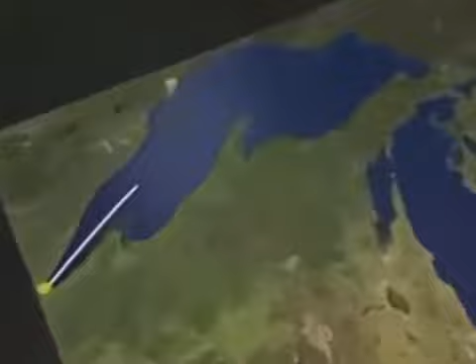When the storm had passed, the Edmund Fitzgerald was to deliver its iron ore to its final destination in Detroit steel mills, where the ore would be used to make cars.

Despite the storm, the men were confident in their safety because the Fitzgerald was one of the strongest and most capable ships on the lakes. This was a big, powerful boat, and people really wanted to be on the Edmund Fitzgerald. This was the one you aspired to serve on.

In fact, when it was launched in 1958, it was the premier ore carrier on the Great Lakes, setting records for the largest loads carried and the fastest trips.

The captain, Ernest McSorley, was also one of the most experienced in the business, with 44 years of sailing on the Great Lakes. But on November 10th, 1975, McSorley was virtually blinded by two critical navigation system failures.

He reported to a nearby ship that both of his radar units weren't working, and the radio direction finder was useless because of an outage at a station on shore.

That nearby ship, a few miles behind, was the Arthur Anderson, a slightly larger carrier also trying to reach Whitefish Bay. Captain Bernie Cooper, using the Anderson's radar, was radioing general compass headings to the Fitzgerald's crew.

The pilot house of a ship nearly identical to the Fitzgerald, the William Clay Ford, at the Dossin Great Lakes Museum in Detroit, gives a sense of what the captain and crew of the Fitzgerald were dealing with on November 10th.

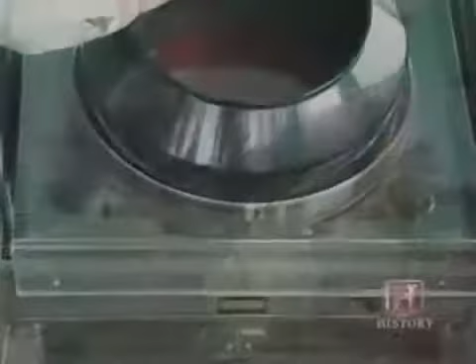This is the radar unit on the William Clay Ford. It's very similar to the one that was on the Edmund Fitzgerald. The Edmund Fitzgerald's radar unit, however, that night was out. For whatever reason, both units didn't work.

Why both of the Fitzgerald's radar units didn't work remains a mystery. There were no reports of problems before the ship left port. It's possible that the huge waves or high winds disabled the antennas on the Fitzgerald's roof.

But the Anderson battled the same storm without any radar problems. The other option they had was to use the radio direction finder. With this, they could triangulate their course. However, the Whitefish Point sending station was out of service.

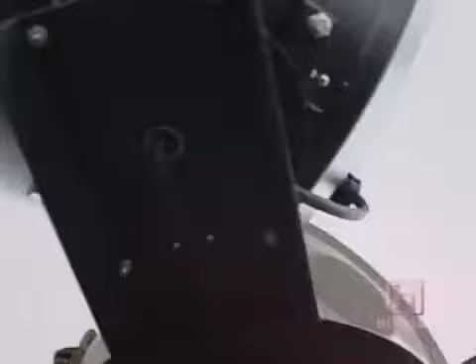On shore, the radio direction beacon at the Whitefish Point lighthouse didn't work. The storm had knocked out power, and the backup generator didn't kick in as it was supposed to. These failures may have doomed the Edmund Fitzgerald.

At about 3:30 in the afternoon, McSorley reported to Cooper that one of the fence rails, part of the sturdy safety fences on each side of the Fitzgerald, had snapped. He also said two vent covers were missing, and the ship was listing to the side, evidence that water was entering the Fitzgerald.

These were all signs of severe damage, but the ship soldiered on, pumping out water as it went.

Then at 7:10 p.m., the first mate aboard the Arthur Anderson asked McSorley how the men of the Fitzgerald were doing. The response back from Fitzgerald to the Arthur Anderson was, "We are holding our own." That was the last communication between the two ships.

Minutes later, the Edmund Fitzgerald disappeared from the radar screen aboard the Arthur Anderson, without as much as a distress signal.

After a difficult and limited search during the storm, and a larger search the next day, it was clear the unthinkable had happened. It looks from the information that we have that it's fairly certain that the Fitzgerald went down, and we're talking now about a matter of life and death and looking for survivors.

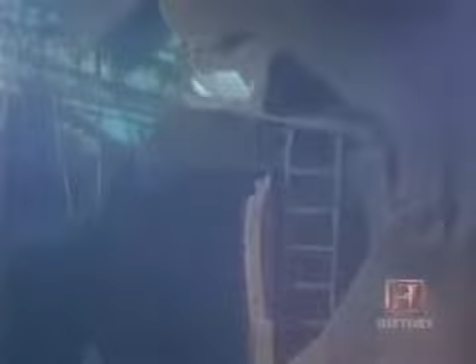The ore pellets from the cargo hold were strewn about, and the middle 200 feet of the ship had disintegrated into small pieces. But finding the wreck didn't provide answers to the questions about what caused the Fitzgerald to sink, and why the crew never called for help.

More than 3 decades later, strong opinions still surround the theories of the ship's tragic fate. A Coast Guard investigative board looked into many possibilities. Probably the only one they could confidently rule out once the wreck was discovered was that the Fitzgerald had broken in half on the surface. The ship didn't break in half because the bow would have floated for a while longer and the stern would have floated for a while, and they both would have disappeared a little bit further apart. Instead, the two pieces of the ship lay only a few hundred feet apart.

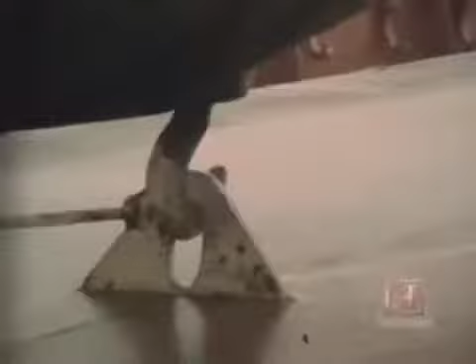In terms of official findings, the Coast Guard report issued on July 26, 1977, concluded that water crashing on the deck and leaking through cracked and poorly sealed hatch covers was the most likely cause of the disaster. The seals on freighter hatch covers were often damaged during loading and unloading, and crews often skimped on the tedious process of tightening most of the hatch cover clamps.

Still, many people disagreed with the Coast Guard's theory. If water was leaking in through the hatch covers, then the pumps that were on - these 7,000 gallon per minute pumps, and there were 2 of them going - should have been able to keep up with as much water as these hatch covers would allow through leaking.

The Lake Carriers Association, which represented 15 shipping companies, protested to the National Transportation Safety Board, which issued its own findings on May 4, 1978.

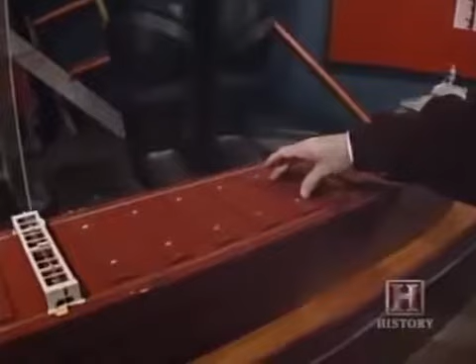The NTSB also focused on the cargo hatches, but in a different way. It felt the tremendous weight of the water crashing across the Fitzgerald's main deck, known as the spar deck, forced one or more of the hatches to implode and swiftly flood the cargo hold. You can tell by the size of these things, the 729-foot freighter - these things weigh tons, and it would take an awful lot of weight to cause them to implode.

Finally, the Lake Carriers Association proposed its own theory, that the Fitzgerald struck bottom in the shallow waters around Caribou Island, a plausible consequence of the ship's navigation system failures. Hitting bottom could have caused a rupture in the hull below the waterline. The downed fence rail and missing vents that McSorley reported near Caribou Island seemed to bolster that scenario.

This was serious. How serious? Not serious enough that McSorley thought he couldn't continue on. He had his pumps going. He thought he had it under control. But as Bernie Cooper pointed out later, it's serious when a fence rail comes down - that indicates an incredible change in tension in the hull itself.

The type of tension that would result from the middle of the 729-foot ship hitting bottom. And if you hog a ship - meaning cause it to bend up in the middle - you can stretch those cables and cause them to snap because they're supported with stanchions all the way along. Something's got to give. But since there are no scrape marks on the portion of the hull wreckage that can be seen, bottoming out, like the other explanations, remains just a theory.

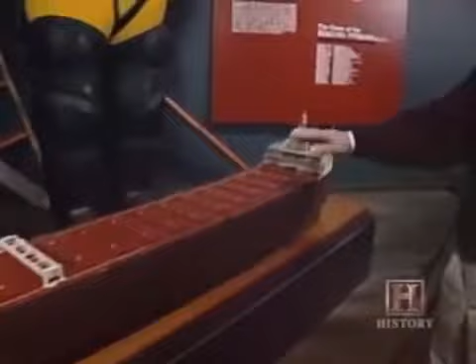However, one thing most of these theories agree on is that the Fitzgerald was taking on water faster than it could be pumped out. And the more water that came in, the lower the ship would ride in those high seas. The waves were actually boarding the Fitzgerald on the starboard quarter, rolling the full length of the deck, the spar deck, and hitting the back of the pilot house, actually forcing this 40-foot high structure underwater, and it'd come back up and shake the water off the deck and keep going.

But one of those dives that did under one of these huge waves was the final dive, and it just kept going, 535 feet to the bottom.

If McSorley believed the ship would resurface after that final wave, then the first sign of trouble, and the last, would have been a wall of water bursting through the windows of the pilot house from the increased pressure of deeper waters. This would explain why there had been no distress call.

But there's still no single theory about the tragic fate of the Edmund Fitzgerald that will satisfy everyone. The bodies of all 29 crewmen remain entombed in that watery grave, and at the request of their families, divers are no longer permitted near the wreck.

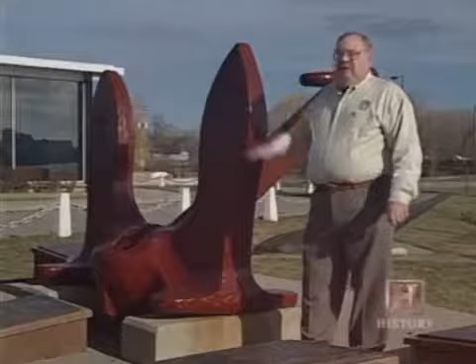But those relatives do have two special places where they can feel close to their loved ones. Just outside the Dossin Great Lakes Museum in Detroit, an anchor that belonged to the Edmund Fitzgerald prior to its last voyage is displayed. It is the centerpiece in the annual November memorial. We put 29 lamps out here around it, one for every crew member on the Edmund Fitzgerald.

And at the Great Lakes Shipwreck Museum at Whitefish Point, the original bell from the Edmund Fitzgerald is the centerpiece of the collection. Known as the voice of the ship, it was recovered from the wreckage at the request of the families on July 4th, 1995.

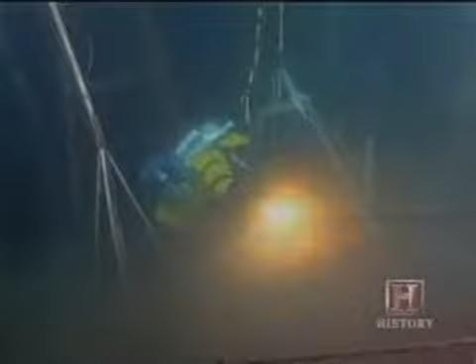When this bell broke the surface after 20 years of darkness and silence, it actually swung and tolled, and everybody around for about a mile could hear it. It was one of the most eerie experiences I've ever had, and the tone itself has such a resonating quality to it that is something that you'll never forget.

After the original bell was recovered from the wreckage of the Edmund Fitzgerald, a replica bell was put in its place. The names of all 29 crew members were inscribed on the replica, which serves as a permanent grave marker.

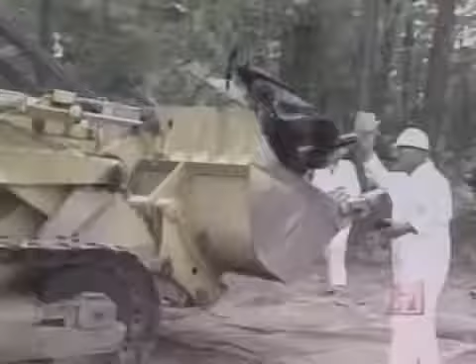Investigators rushed to the scene, immediately aware of the similarities to the 1991 Colorado Springs crash. This time, they had more information to work with. We had more flight data recorder parameters. And also, with US Air 427, the rudder power control unit that controls the rudder was intact. It was in a testable condition, which we didn't have before.

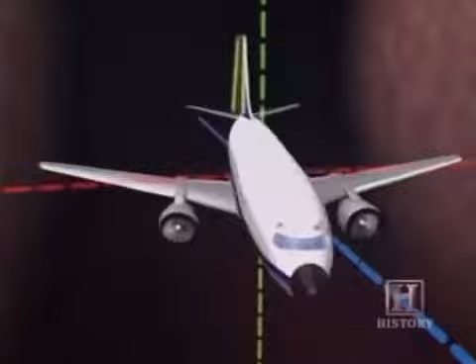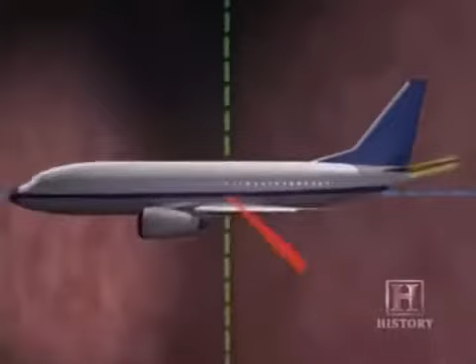The rudder of an airplane functions much like the rudder of a ship, turning the aircraft to its right or left, which is known as yaw. Flaps on the wings, known as ailerons, control the roll of the plane to the left or right. Adjusting the horizontal stabilizer on the tail affects the pitch, which raises or lowers the nose of the plane.

But extreme rudder movements can affect more than just the yaw of an aircraft. What happens when the rudder reaches its full travel limit is that the airplane slips through the air sideways. And as a result, for airplanes that have swept-back wings, one wing develops more lift than the other, and the airplane then starts to roll.

At relatively low speeds, such as during takeoff, or in the case of both crashes, on approach to landing, if the extreme rudder position is not corrected, the rudder will overpower any aileron adjustments and force the aircraft all the way over, leading to a nosedive into the ground.

Initial tests of the US Air rudder equipment didn't reveal any defects. Because the crash happened on a clear evening with little wind, adverse weather could be ruled out. The only other possibility seemed to be pilot error or disorientation.

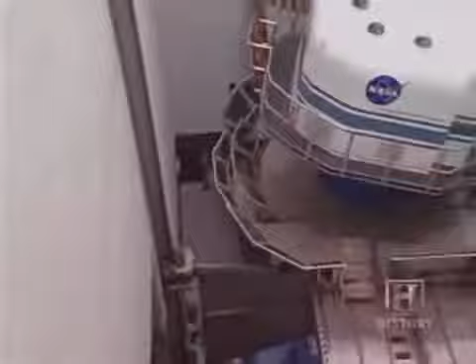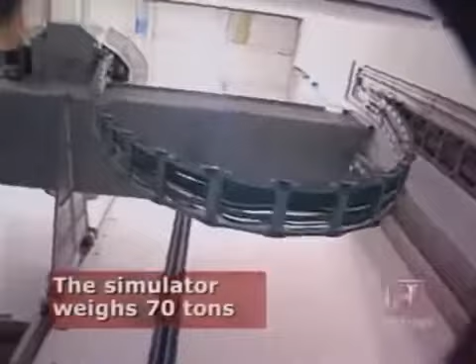To test the motion effects recorded from the US Air flight in 1994, investigators went to the NASA Ames Research Center in Northern California, home of the world's largest flight simulator. Unlike other simulators that simply pivot on a stationary platform, the center's vertical motion simulator can move 60 feet up or down and 40 feet side to side.

Pilots that we've had from all over the world that have come in to fly the vertical motion simulator say that it replicates flight like no other simulator they've ever been in.

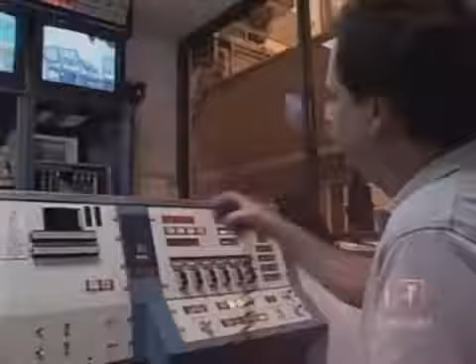Technicians loaded information directly from US Air 427's flight data recorder into the simulator's computers. The result, seen here using the same flight information, was a chilling reconstruction of what the crew most likely saw and felt.

As we roll out, there'll be a wake vortex upset that resulted from a 727 that was flying ahead of the 737, and that started the maneuver. Right there you feel the wake vortex upset. The pilot then tries to right the airplane, but during that process the rudder goes over hard to the left, and as a result the airplane rolls uncontrollably to the left. It must have been terrifying in the cockpit.

Nothing from the work in the vertical motion simulator led investigators and motion experts to believe that pilot error or disorientation were factors in the crash.

They returned to the rudder control system but could still find no sign of malfunction. Then, a vital clue: in June 1996, an Eastwind Airlines pilot reported rudder problems. It seemed like the hydraulic system of his 737 was actually pushing back when he depressed the foot pedal that controlled the plane's rudder. Luckily, the plane didn't crash because the incident didn't occur during takeoff or landing.

This incident led NTSB investigators to examine how the rudder could have moved opposite of the pilot's control. They focused on the hydraulic heart of the system, the rudder's dual servo valve power control unit.

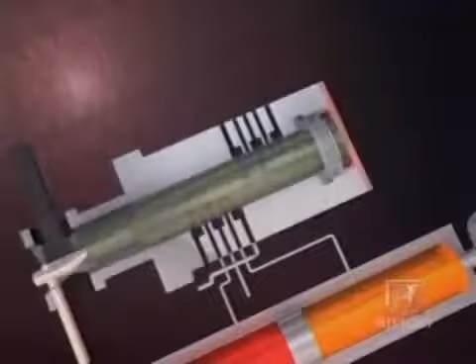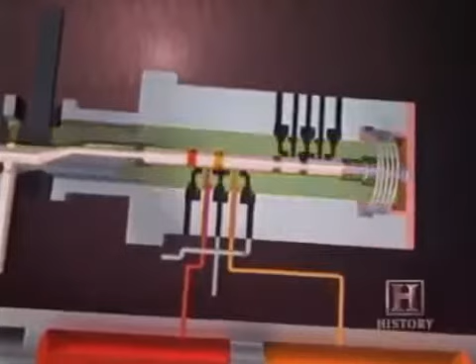It's about the size of a soda can, and inside of that is a valve about the size of a pencil that's got ridges in it, and it moves back and forth and ports fluid. That's the primary valve. Around that is a slightly larger valve, cylindrical in shape with ports in it, and that's the secondary valve. When a rudder is operating normally, only the inner primary valve is supposed to move.

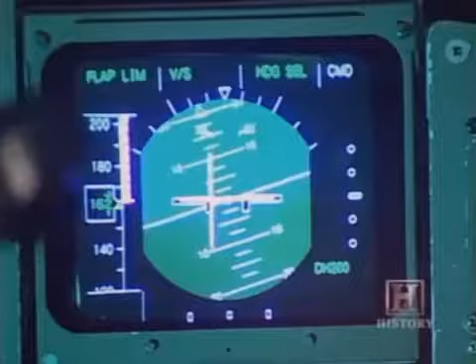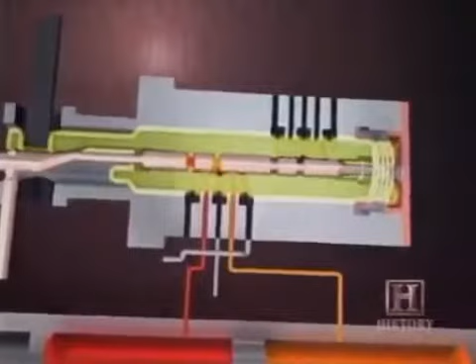Depending on which direction a pilot wants to turn, the hydraulic pressure either extends or retracts a piston, which then turns the rudder. Once the pilot's foot is off the pedal, the pressure is released, and the rudder returns to a neutral position. The outer secondary valve only moves if the smaller primary valve becomes stuck.

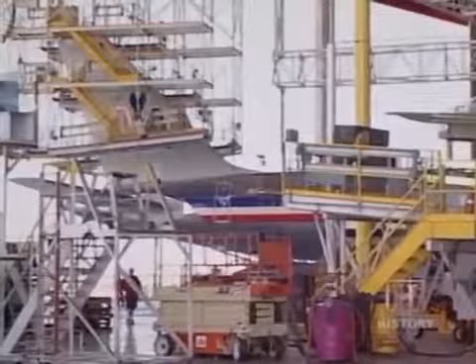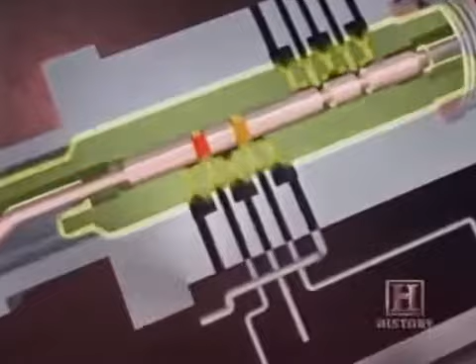Virtually all aircraft systems have both a primary and a backup, an important design feature known as redundancy in the airline business. But since the 737's rudder power control unit used two valves within the same hydraulic system, the valves were not totally independent of each other.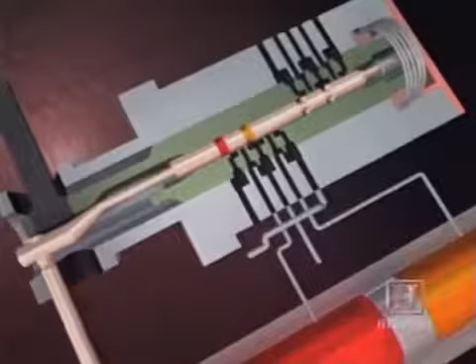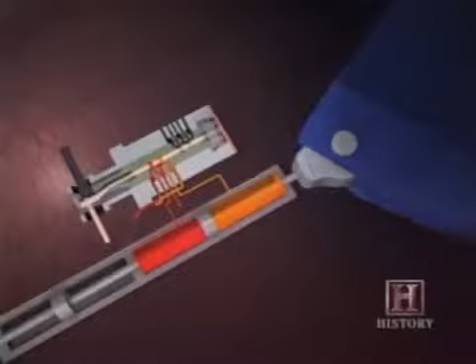In 1998, investigators discovered how the valves had created the deadly problem. We saw that if the secondary valve were to be jammed just slightly off neutral, and you put in a high rate command into the primary valve, you could misport the hydraulic fluid and cause the rudder to reverse operation. This would be very similar to driving your car.

You turn to the right, the car goes left. You probably will keep trying to turn to the right. You won't figure that out before you go off the road.

The longest NTSB aircraft investigation in history was finally over, 4.5 years after the US Air 737 crash in Pittsburgh.

Instructors immediately taught 737 pilots ways to correct the problem, such as momentarily removing a foot from the pedal to release pressure in the event of a jam, and switching from the primary to the secondary hydraulic master control for the entire aircraft in order to free the rudder.

The training continues today because the new units with two completely separate rudder control systems are still being installed. In fact, the retrofit process won't be complete until near the end of the decade. However, the planes are still safe in the meantime, thanks to extensive pilot training. And the 737 seems destined to remain the workhorse of the industry as the design changes are completed.

Since the 737 debuted in 1968, Boeing has built over 5,000 of the planes, making it history's best-selling passenger airplane.

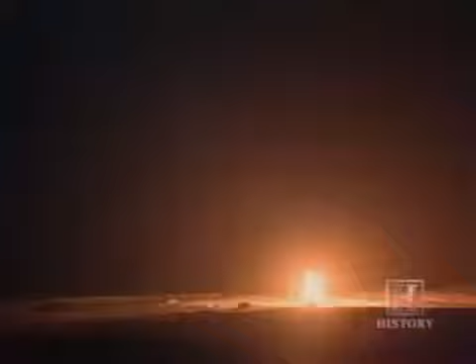We now return to engineering disasters on Modern Marvels. In 1959, just 30 miles from downtown Los Angeles, a little-known nuclear disaster began to unfold at an important Cold War facility. The Santa Susana Field Laboratory, created by the government's Atomic Energy Commission and operated by Rocketdyne, played a vital defense role by producing powerful rockets. The 2,800-acre site was built in the hills above Simi Valley, a town of 8,000 just west of Los Angeles's San Fernando Valley.

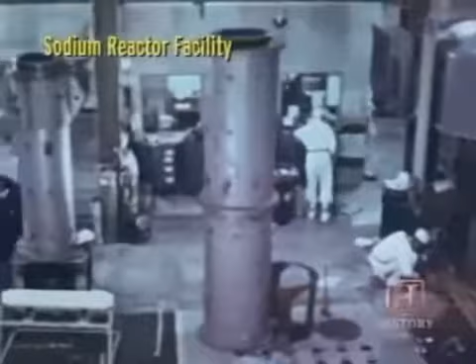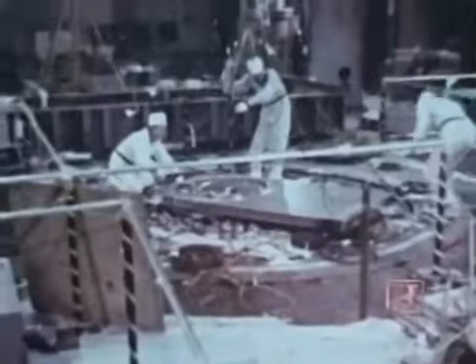Besides rockets, it was home to several experimental nuclear reactors, which the Atomic Energy Commission hoped could be commercially viable. One of them used sodium instead of water as a coolant. It was known as the Sodium Reactor Experiment, or SRE. But the experiment would soon trigger a technological nightmare.

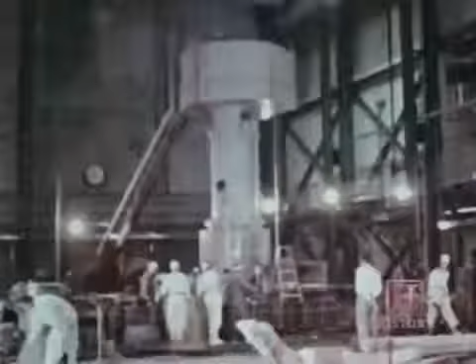This reactor was built in an era of nuclear cowboys. The Atomic Energy Commission came out of the Manhattan Project. There was a culture of secrecy, and a sense of excitement about pushing the limit on these reactors.

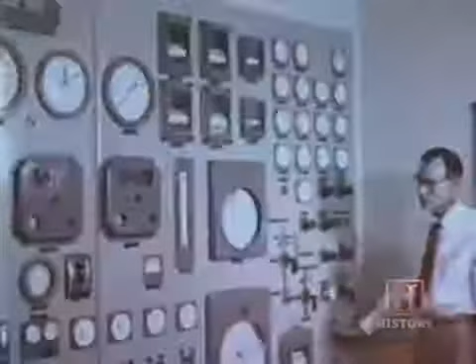On July 13, 1959, technicians barely managed to manually shut down the sodium reactor when temperature and radiation readings quickly jumped. Then, after 2 hours of basic inspections, they made a baffling decision: they started up the reactor anyway. They operated it for about 2 more weeks before radiation levels and so many signs of trouble made them think it was time to stop and get serious about finding out what was going wrong.

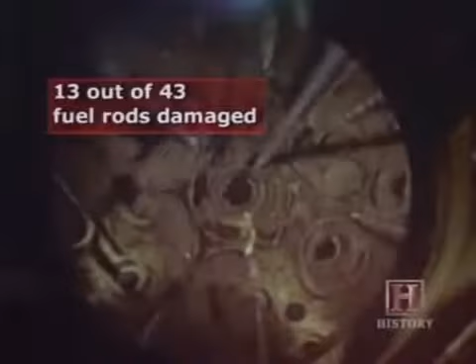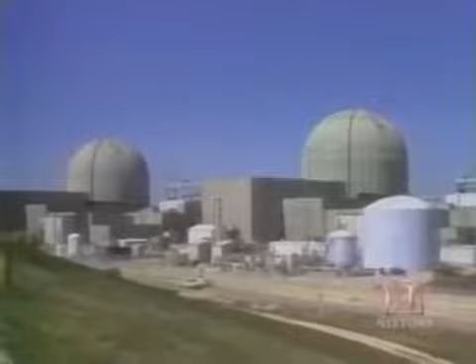When they dropped a camera into the reactor core, they discovered that 13 of 43 radioactive fuel rods were damaged and partially melted. Because this was an experimental reactor, a thick concrete containment structure, such a familiar and vital part of more modern reactors, wasn't required. It was just built in an ordinary industrial building. In fact, it was designed so that radioactive gases would be intentionally vented from the reactor to holding tanks and then out into the environment.

Exactly how much radiation went into the atmosphere is still a matter of debate, because the monitoring equipment at the facility could only measure very minor levels of radiation.

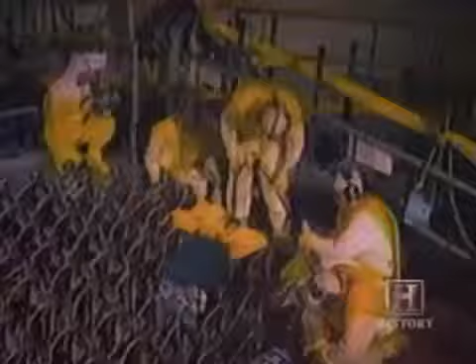This was a much smaller reactor than the one at the site of the famous Three Mile Island accident in Harrisburg, Pennsylvania in 1979. But because it didn't have a containment dome, the sodium reactor might have created a much bigger problem. The SRE was about 1/100th the size of Three Mile Island, and the containment structure at Three Mile Island, according to official government reports, stayed intact, with only a small fraction of the radioactive inventory officially estimated to get out. Several researchers have estimated that the radiation release from the SRE could be as high as 240 times the radiation release from Three Mile Island.

5 weeks after the accident, the Atomic Energy Commission issued a press release claiming that just a single fuel rod had been slightly damaged and no radiation had been released. The release stated there was no evidence of unsafe operating conditions. In reality, 1/3 of the fuel had experienced melting. It was one of the worst accidents in nuclear history, and the AEC essentially lied about it.

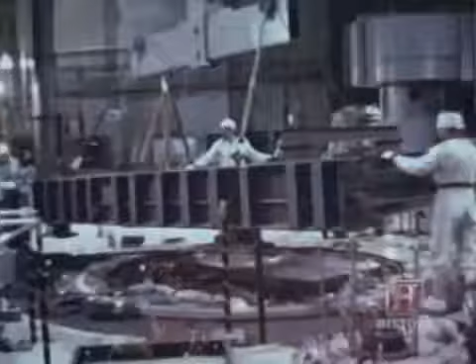In 1961, the Atomic Energy Commission made a film documenting the extent of the damage and cleanup process. It also explained exactly what went wrong inside this unique reactor, where molten or liquid sodium was used instead of water to remove heat from the swimming pool-sized reactor area.

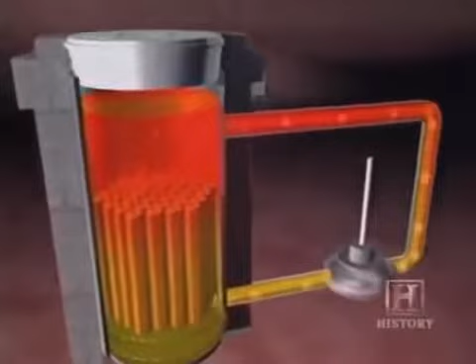Sodium reactors were being developed because there was a concern there wasn't enough uranium to fuel all the nuclear reactors being built at the time. Sodium reactors never deplete their original fuel supply, while water reactors are less efficient, since they consume uranium and eventually need to be resupplied.

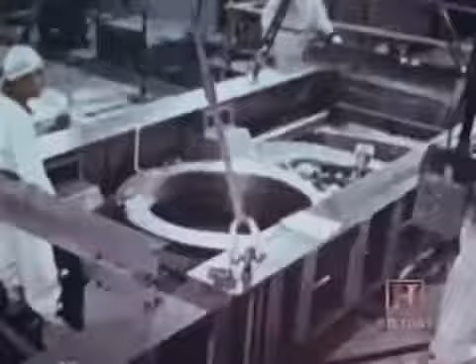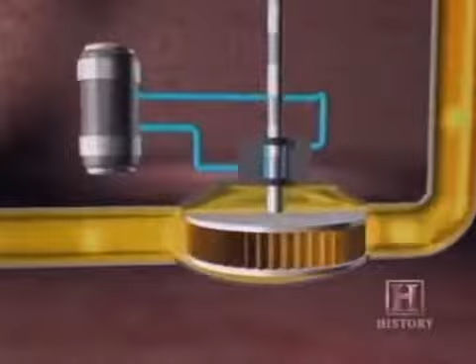But the benefits of liquid sodium came with a price. Sodium burns in the presence of air and explodes in the presence of water, so the reactors had tremendous danger associated with them. Because water couldn't be near the reactor, a chemical known as tetralin was used to cool the bearings in the pumps that circulated the sodium as it carried heat away from the fuel rods.

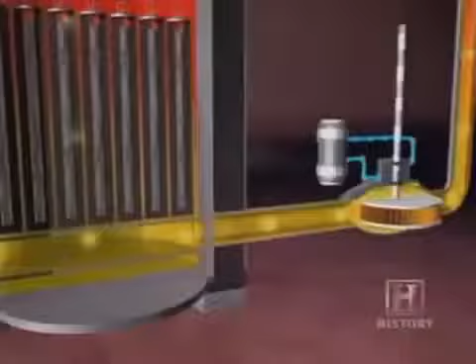Everything worked well until tetralin started leaking through cracks in the pump seals and into the reactor. The neutron bombardment inside the reactor core caused it to turn from an organic chemical into almost like a glue or tar-like substance. As the tetralin approached the fuel rods, it partially blocked the bottom of some of the coolant channels. When coolant flow decreased, the heat by those fuel rods increased and eventually reached melting point.

What happens when the fuel starts melting is the radioactive byproducts, which have been created from reactor operation, have to go somewhere. So those radioactive byproducts go into the molten sodium, and some of those byproducts come out as a vapor, and in this case went into the air.

Some of the radioactive materials, like strontium, are actually absorbed by the body into the bones and teeth, so they remain in the body for a long period of time, all the while releasing radioactivity that can harm cells and other parts of the body.

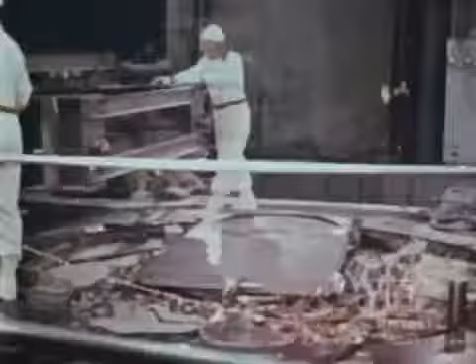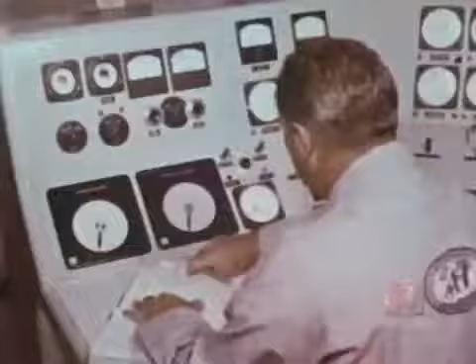Workers who cleaned up after the accident or worked at the facility once it was restarted were at highest risk. Studies done of the workers by a team from the UCLA School of Public Health found that the workers who had the highest radiation exposures had tripled death rates from cancers such as cancer of the lung, lymph, and blood systems, compared to similar workers at the site who had lower radiation exposures.

The University of California at Los Angeles was also responsible for bringing the story to the public. After the 3 Mile Island accident in 1979, some of Daniel Hirsch's students started wondering if anything like it had ever happened in Southern California.

In UCLA's engineering library, they found documents and photographs of the melted fuel rods from the sodium reactor accident at the site run by Rocketdyne's Atomics International division. By a quirk of fate, it turned out that the man who had founded and run Atomics International had subsequently become Dean of Engineering at UCLA and taken with him box loads of the old documents.

We then released that to the press in 1979. So the AEC kept it secret, and it stayed secret for 20 years. The Atomic Energy Commission also managed to conceal accidents at 2 other reactors at the Santa Susana facility in the 1960s.

Today, the reactor buildings have been torn down and taken away, but years of cleanup work remain. Health effects on the surrounding communities have been difficult to study because of their large populations and the fact that many people have moved out of or into the area over the years. And Southern California's population continues to swell. People are living closer than ever to the site, which is now owned by Boeing.

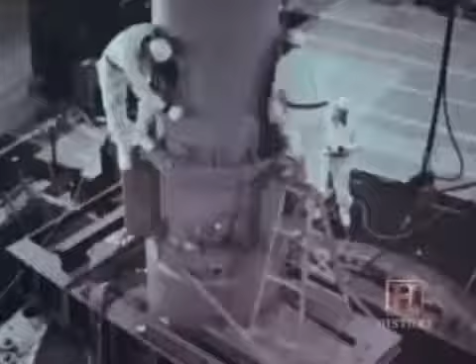Because certain types of radiation released in the accident can remain at dangerously high levels for centuries, the decisions made at Santa Susana in the 1950s and 60s will continue to affect residents for generations to come.

Of the 3 most prevalent radioactive elements identified at the Santa Susana site, cesium-137 has the longest half-life at 30 years. Dangerous amounts of it will remain there for about 300 years.

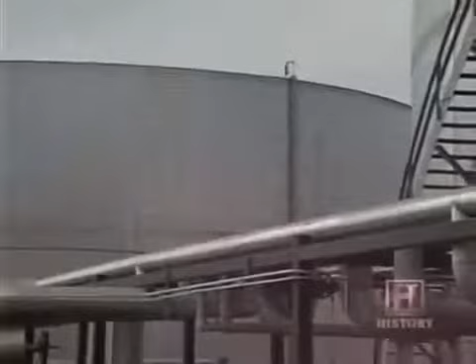25 miles south of Pittsburgh, in the heart of one of Pennsylvania's industrial valleys, along the banks of the Monongahela River, 4 million-gallon storage tanks mark the site of a past disaster. In 1988, when the oil storage facility in Floreffe, Pennsylvania was owned by Ashland Oil, different tanks located in the same spots held fuel oil.

On January 2nd of that year, a typically frigid winter day, a 40-year-old tank was being refilled for the first time after being disassembled in Cleveland, Ohio, and reassembled in Floreffe. Then, in less than 1 second, the tank cracked vertically, releasing a tidal wave of about 3.8 million gallons of oil. When the tank split, the force of the weight of oil in the tank pushed the shell of the tank, the skin of the tank, back against this dike wall in this direction.

The oil rushed over the containment dikes in front of the split, hurtling toward other nearby tanks. The tank that collapsed, which was behind me, released the oil. The tank that was formerly in this direction was dented by the force of the oil approximately 20 feet up on the wall of that tank. The tank was empty, but it gives you some perspective on how much force there was involved.

While some oil remained inside the dikes, the faster parts of the flow raced over the final barriers at the south end of the facility. When the oil went off to my right, it went over the last dike in that direction into a parking lot. The parking lot has a drain in it. The oil followed that drain into the Monongahela River.

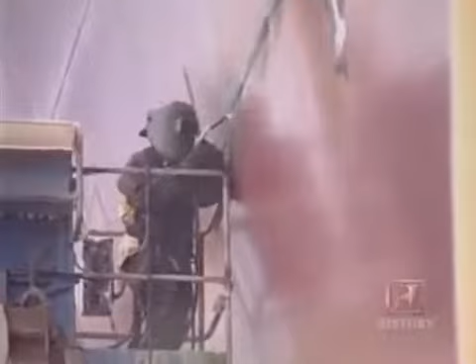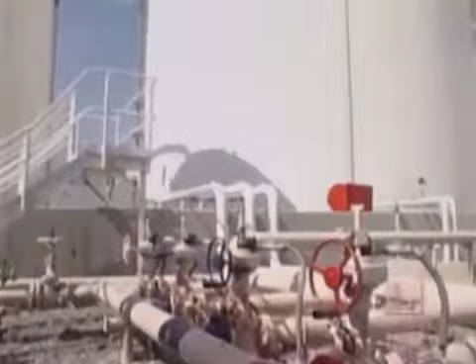Even today, small defects like this aren't uncommon in these huge tanks. It's hard to prevent such imperfections during large cutting and welding operations. But ordinarily, weak spots in modern tanks lead only to small leaks, which can then be easily repaired and cleaned up. Because of the speed of the collapse, the clean split, and the telltale chevron markings, investigators quickly identified brittle fracture

Brittle fracture, often a problem with weaker forms of steel dating from the 1940s and earlier, was identified as the cause of the catastrophic failure in the tank. Brittle fracture has been known to plague a variety of older structures, even large ships.

Tests revealed it was the main reason for the failure of this tank, which had been built in the early 1940s. And the weather compounded the problem. Sub-zero temperatures before and during the filling made the tank's old steel even more brittle.

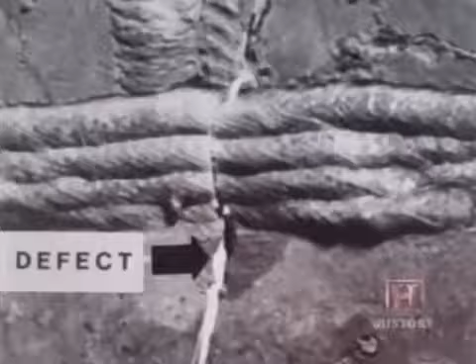The exact location of the defect was also a factor. Welds are always weaker than the solid inner portions of a plate. When workers disassembled the tank in Cleveland, new cuts were made away from the original welds, since rewelding the same area can actually make it weaker.

But when the tank was put back together in Pennsylvania, the defect happened to be in an especially dangerous spot. The fracture occurred in this general location. This is also the location where a horizontal weld and a vertical weld come together. We call it a T-joint, and it's in this area that has particularly high stress concentrations.

Once a tank is built, welds, including T-joints, are inspected. To find defects that aren't visible on the surface, like the one in the Ashland tank, inspectors routinely use an X-ray system for metal, known as radiography. The joints where the vertical seam and horizontal seam come together is a typical place where these radiographs are taken. That provided the opportunity to possibly identify this defect, but it was not identified.

Following the investigation of the spill, state and federal agencies put new procedures in place. Pennsylvania implemented above-ground storage tank regulations so that tanks like this one are inspected and tested routinely now, in an attempt to avoid situations like this in the future. The federal government also changed its oil spill requirements in terms of equipment that needs to be available and precautions that need to be taken.

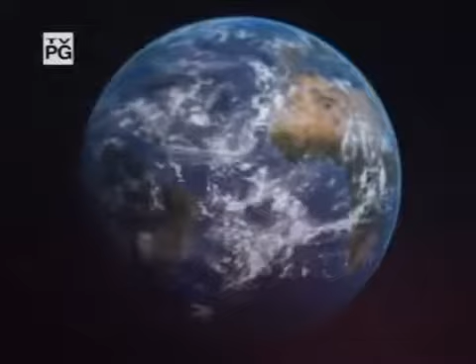On May 19, 1998, at 6 p.m. Eastern Time, the Galaxy 4 communications satellite high above the American Midwest suddenly rotated out of position on its own. This small movement created a disastrous ripple effect below.

Most of the 40 million pagers in service in the United States suddenly went silent for the first time in the 35-year history of the industry. Thousands of ATMs and credit card authorization services also failed, and several television and radio networks were unable to distribute programs to affiliates.

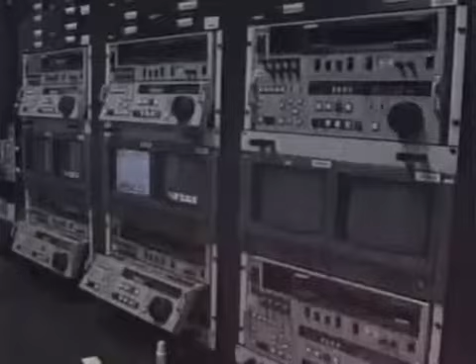There were thousands of antennas on the ground, all expecting to send signals and receive signals back to the Galaxy 4. If it's pointed the wrong direction, it can't hear what the ground is trying to tell it, nor can it send signals back to the ground.

More than 80% of the nation's paging companies depended solely on the Galaxy 4. It took 3 chaotic days for technicians at PanAmSat, the operator of the Galaxy 4, to reroute the millions of pagers to other satellites and restore customer service.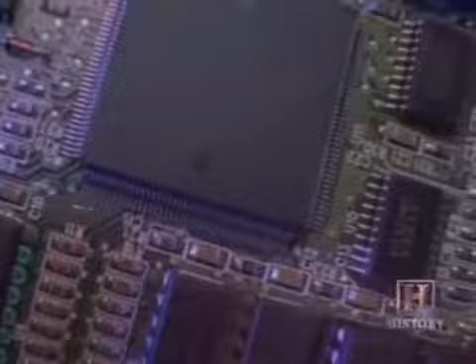Since the satellite is still in outer space, it's impossible to inspect. But the widely accepted cause of this enormous problem is something incredibly small: a short circuit within the positioning system, created by a microscopic phenomenon known as a tin whisker.

The small metal leads on microchips electronically connect the chips to other components on a circuit board, allowing for the exchange of information across the system. These leads are coated with a conductive metal to prevent corrosion. Tin is the preferred coating material because it's widely available and inexpensive.

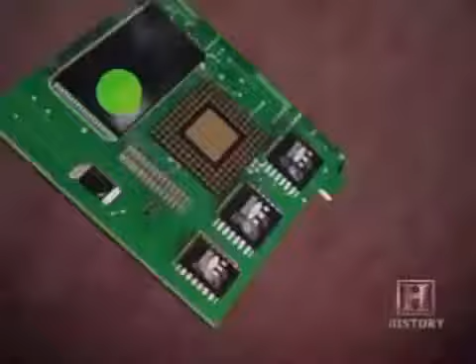Tin whiskers are crystalline structures that grow spontaneously from this coating and can short-circuit microchip components by suddenly connecting leads that aren't supposed to be connected.

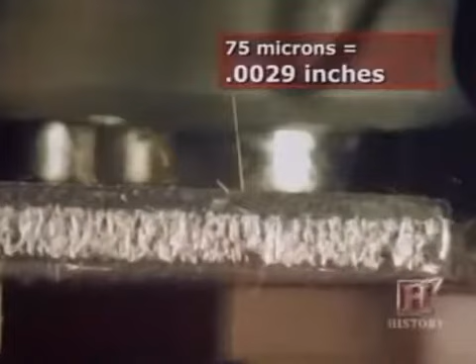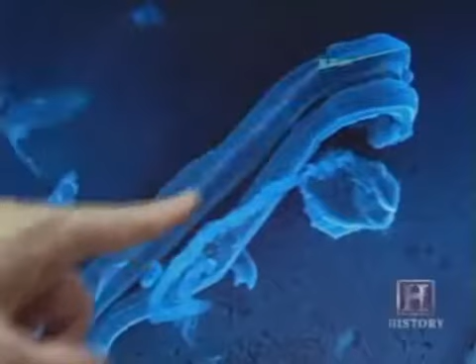Usually these leads are only 75 microns apart, meaning electron microscopes are needed to get a good look at the whiskers. This is a picture of 2 whiskers and maybe a 3rd whisker on the side here. To give you a sense of the dimensions, these 2 whiskers are about a quarter to less than half the diameter of a human hair, and the lengths are about 100 microns, which would cross between 2 leads of this kind of component.

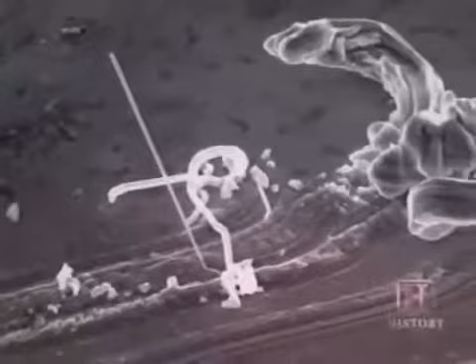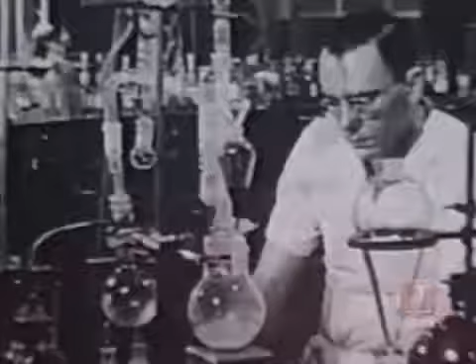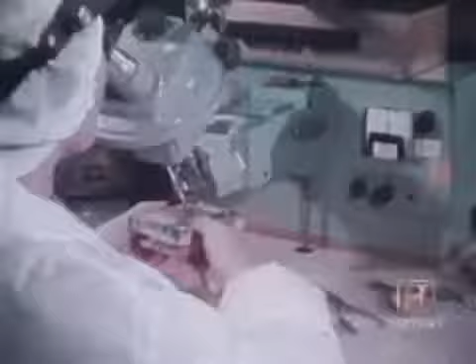The tin whisker that caused the Galaxy 4 to fail grew from the best intentions. Researchers identified whisker growth on tin and other metals as early as the 1940s. During the 1950s, experiments revealed that adding lead to tin created an alloy that greatly reduced whisker growth. But environmental concerns about lead caused many electronics manufacturers to switch back to pure tin, beginning in the 1980s.

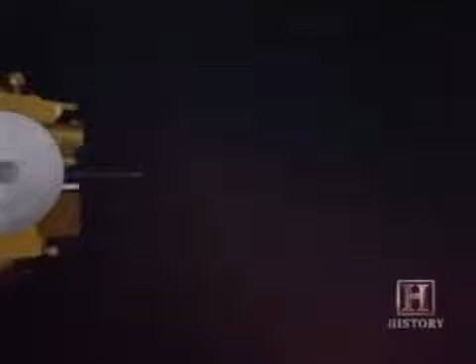Tin whiskers have been blamed for the complete loss of 3 satellites, and have partially damaged at least 4 others. But satellites aren't the only type of expensive and critical equipment that these tiny gremlins strike. They've shown up in F-15 fighter aircraft radar, air-to-air missiles, and heart pacemakers.

In the nuclear power industry, the tin whisker problem showed up in the unplanned shutdown of the Millstone 3 plant in April 2005 in Connecticut. That problem was due to a tin whisker crossing over between circuits in a logic board.

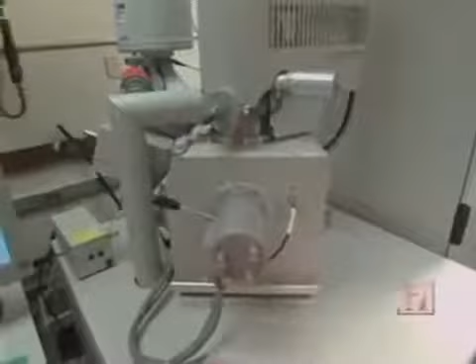Inside the University of Maryland's engineering department, long-term experiments are conducted over several years by subjecting closely spaced plates of tin and other metals to various temperature, humidity, and other conditions. From these experiments, researchers can determine if certain conditions inhibit or promote whisker growth.

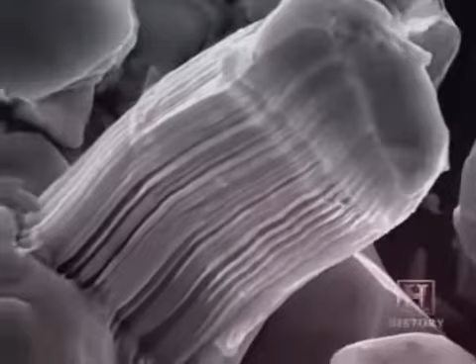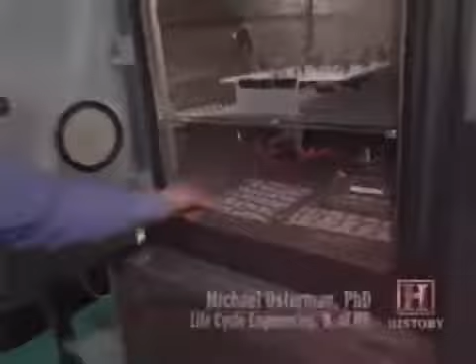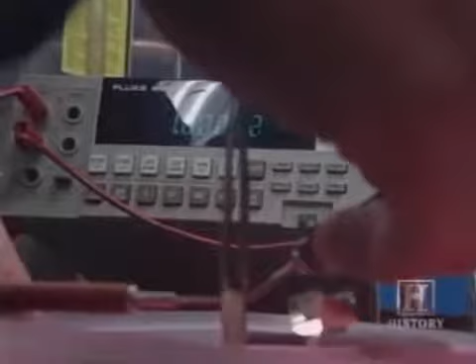These plates are being subjected to 50% humidity at 50 degrees Celsius. Pulling one out, if you look, we have a span of about 75 microns spacing between these 2 plates. Using this resistance measurement, if we have an open circuit, basically we'll record nothing. If we touch these 2 surfaces and there is a whisker, we'll see a response, and as you can see, a response is indicated, which means there is a whisker bridging these 2 surfaces.

But scientists still don't understand how to prevent these formations from occurring in the first place.

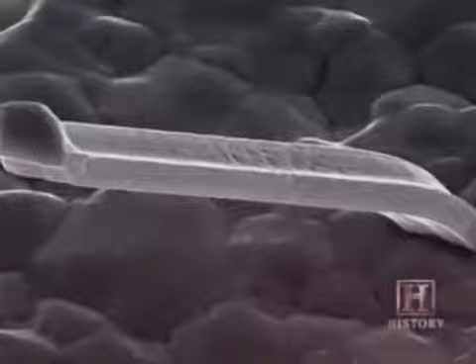Meanwhile, as electronics and microchips continue to get smaller and appear in more and more everyday products, the tin whiskers problem keeps getting bigger. Tin whiskers are a classic example of a very small thing causing a great deal of damage. They have caused hundreds of millions of dollars in damage and are capable of causing damage in the billions.

Until science can find a solution, it seems that all industry and consumers can do is wait for the next gremlin to strike.